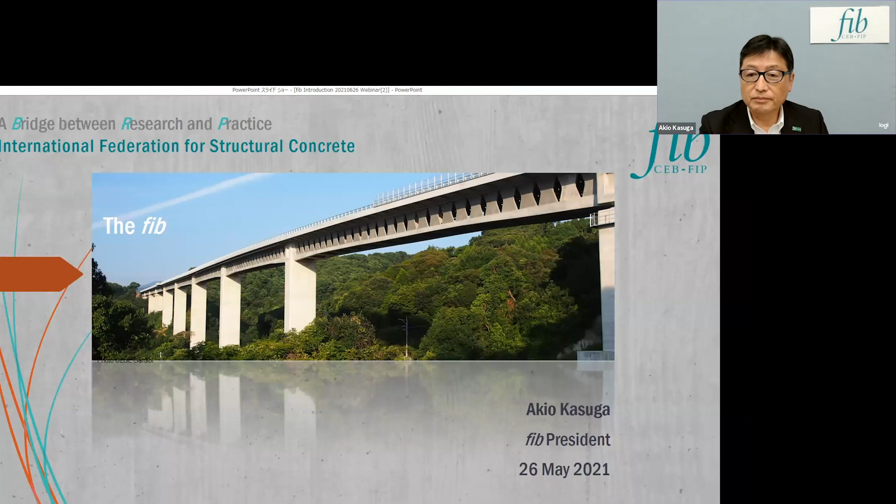Hello everyone, my name is Akio Kasuga, FIB President, and I'll give a very short introduction of FIB. Let me start with a little bit about the history of FIB.

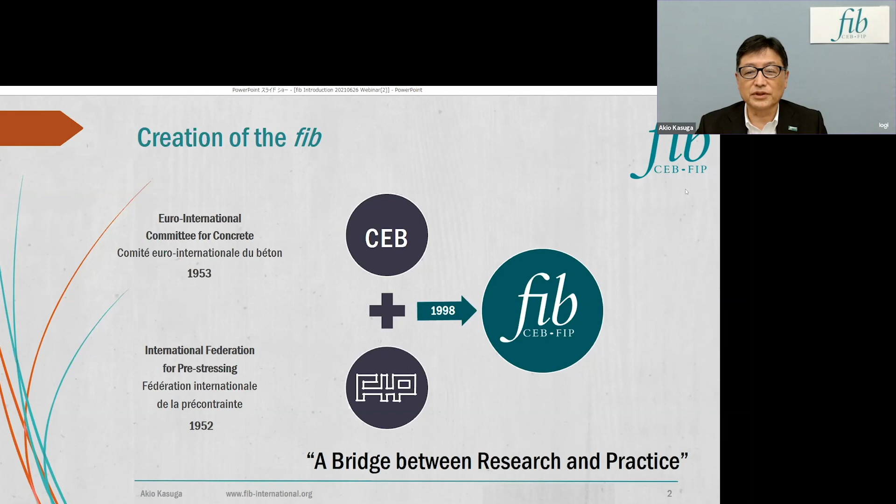FIB started in 1998, converging the CEB founded in 1953 and FIP founded in 1952. Our slogan for FIB is 'a bridge between research and practice.' Now we have 41 statutory member countries all over the world, and we have members in 104 countries and territories, including individual members.

This is our mission and objectives: we started from the stimulation of research and synthesis of findings, and also transfer to design and construction practice. After that, and this is very important, dissemination by publications, conferences, and so on. Finally, we produce recommendations and codes, and again dissemination of the information to all of the members. This is our main activity in FIB.

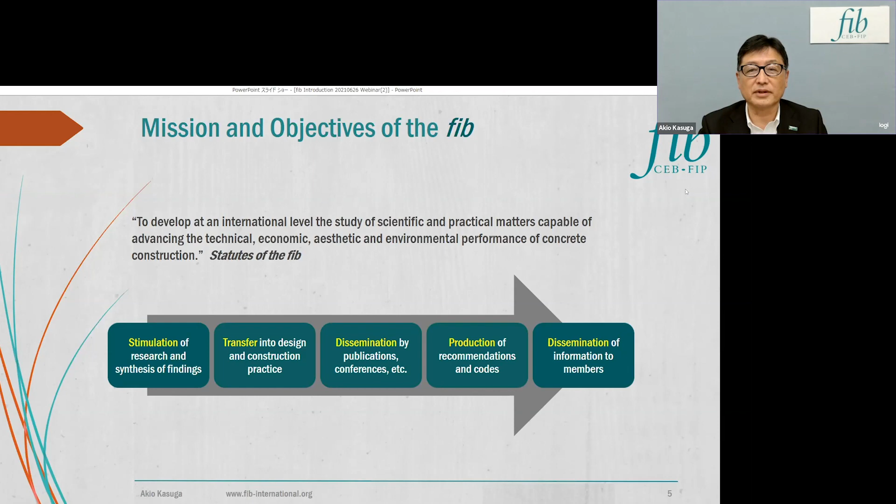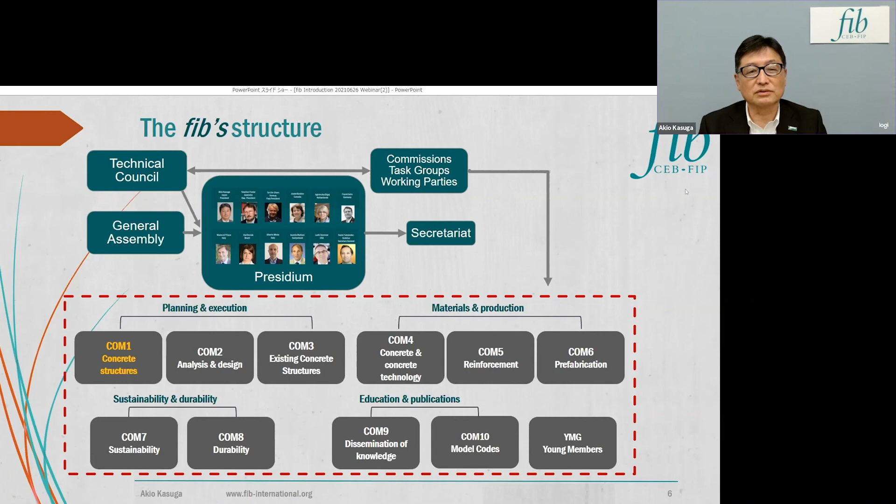This is our structure. We have a technical council and the general assembly, and we have a presidium, and many commissions from Commission 1 to Commission 10. Today's webinar is the output from Commission 1, concrete structures. This is the members of FIB from 2021 to 2022.

Tor Ole Olsen was the past president from 2019 to 2020. We have a variety of countries from all over the world. Our main output is bulletins from each commission. We have some categories: technical reports, state-of-the-art reports, textbooks, manual guides, recommendations, and model codes.

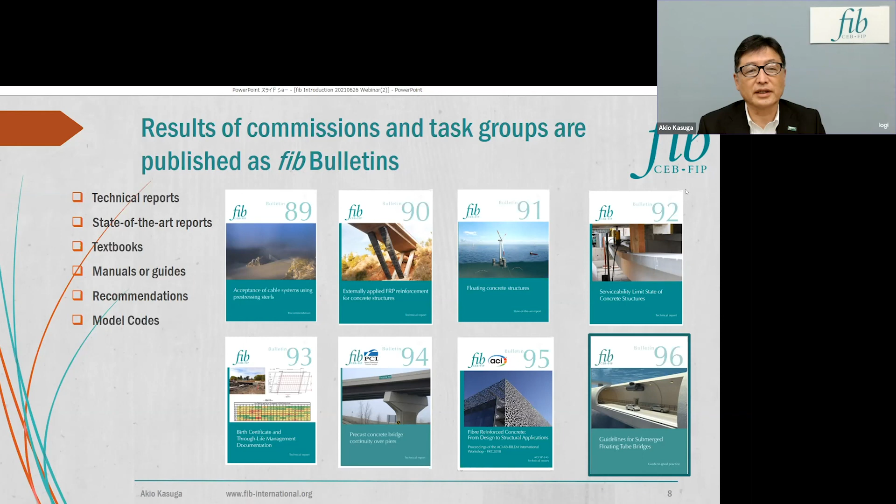We also have the Journal of Structural Concrete. Currently our impact factor is 2.174, a relatively large number for a civil engineering journal. We have 6 issues since 2016. We have many backlogs, and every time the number of papers is increasing.

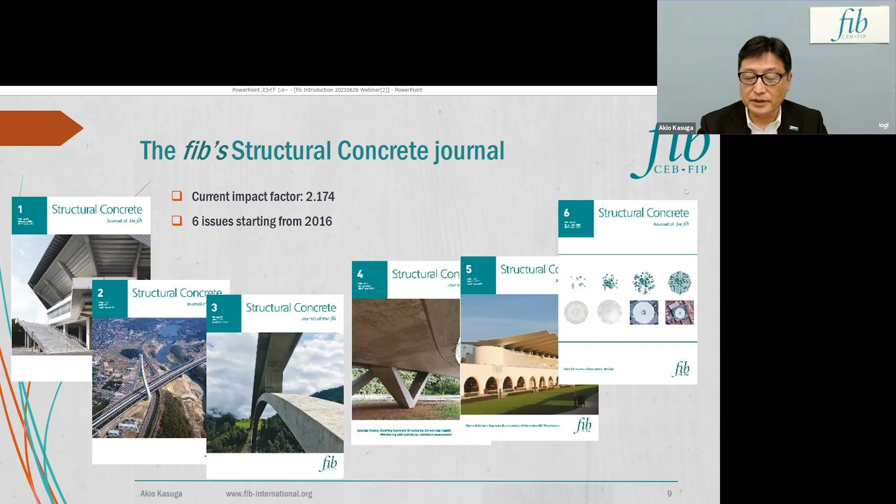So our biggest output event is the launching of the model code to the world. We are now revising the last model code, 2010, and we will launch the model code 2020, including leading edge technologies and many contents of concrete structures.

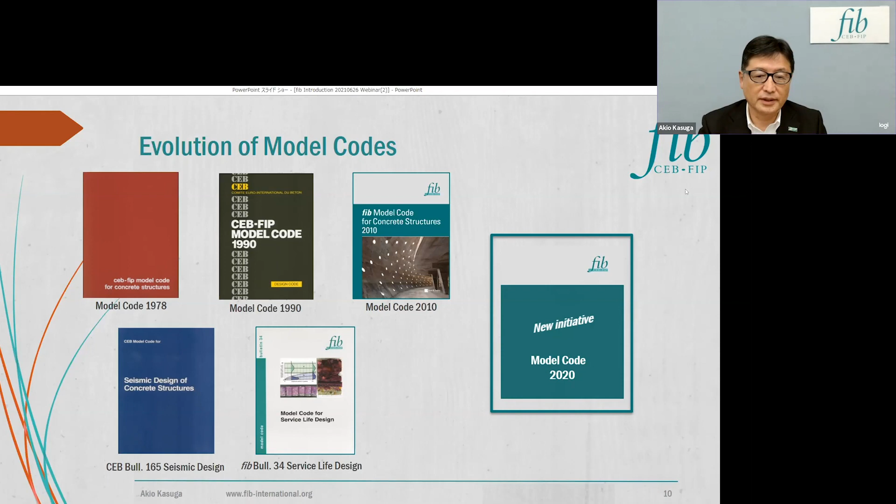Okay, let me tell you about some upcoming events. We have the symposium next month in Lisbon. Unfortunately it's totally online, but many papers will be presented there. Also the PhD symposium in Paris, France in July, which is also online. And the ICCS 21 symposium in Prague in September, and the conceptual design symposium in Switzerland also in September.

And also in 2022, the big event of the FIB Congress in Norway, and also that same year the symposium in Italy. Please come and join us—each event is very interesting for you.

And we have many outputs, bulletins and the symposium, and also we had output using social media. We have FIB News, e-newsletter, and these social media can be used to get information from FIB.

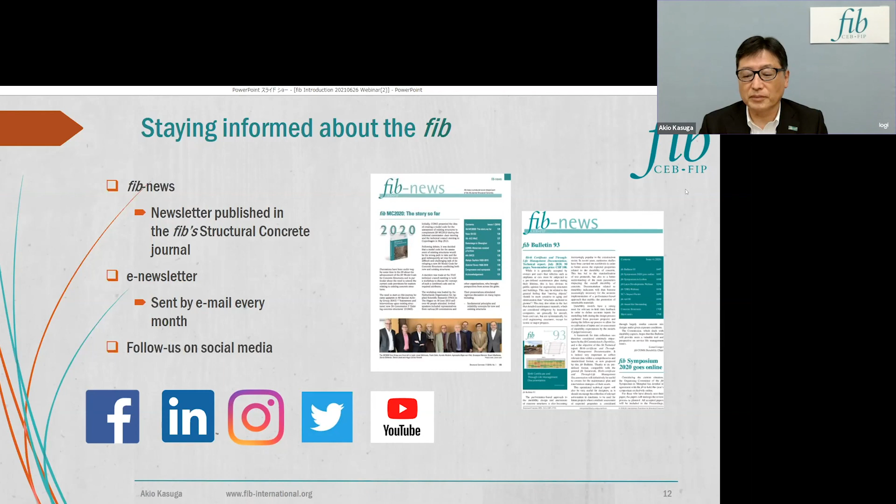And also at the same time, we have a webinar in the YouTube channel like today's event. We have many variety of speakers. Each speaker has very interesting topics. Please come here and join the webinar.

And one of our most attractive activities is for the young members group. The commission chair is Motohiro Ono from Tokyo University, and each country has a very active young member group.

This member group can be joined as a personal member even if your country is not a national member group. So please join us. Please exchange your information all over the world.

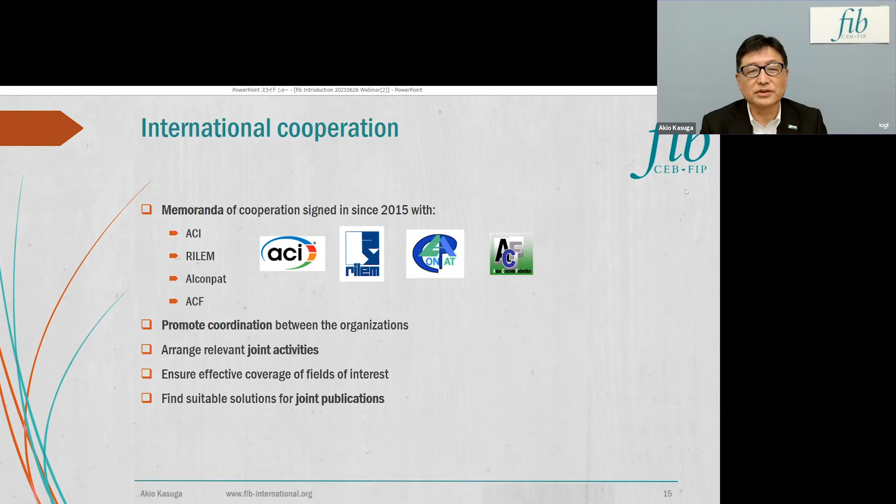And also we have collaborated with other organizations, ACI, RILEM, Alconpat, and ACF, and we had very close communication to make joint activities and joint publications.

And today, the submerged floating tube bridge is the output of working party 1.2.2, belonging to task group 1.2, the convenor Tor Ole Olsen. This is a task group for concrete structures in marine environment. It has been working a very long time, and today's output, Bulletin 96, is very interesting, as you know.

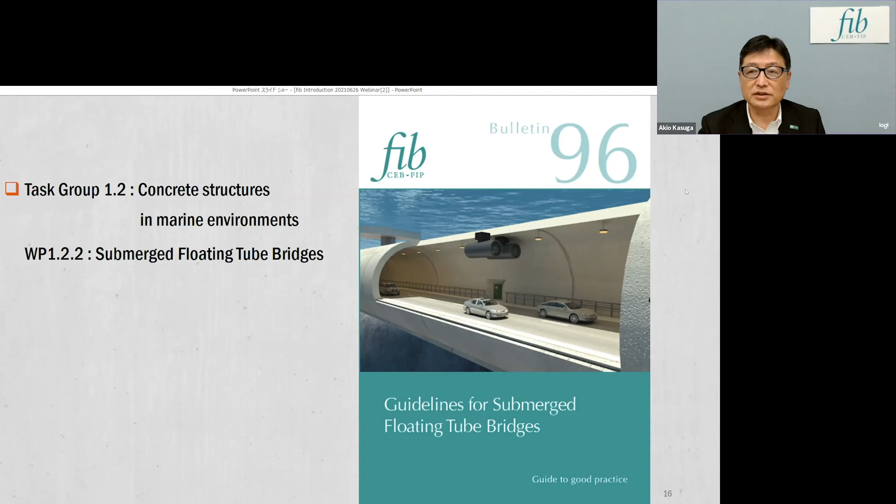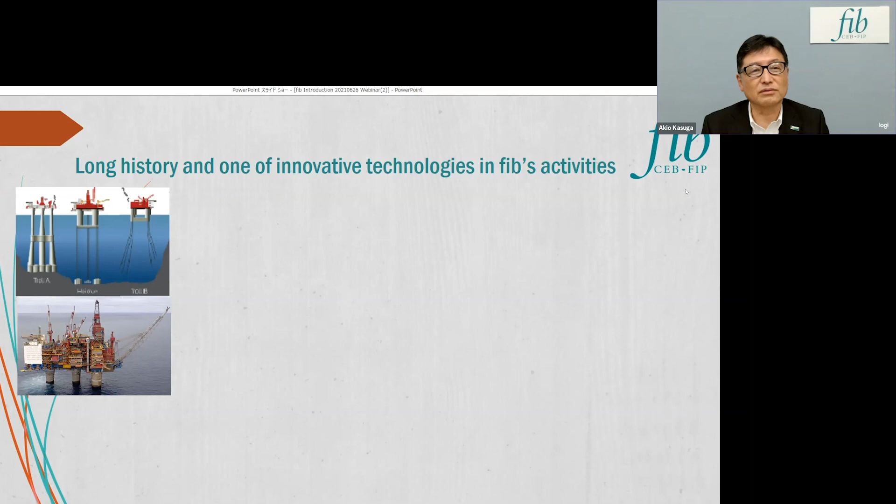Marine structures have a very long history, and I think it is one of the innovative technologies in FIB's activities. About 40 years ago, they had the technology of the oil rig, especially for the North Sea.

And now this technology has extended to wind turbines on the sea, and also today's topic, the tube tunnel under the sea. And Tor Ole Olsen said that by 2070, the temperature of Earth is rising, and also the water level is rising.

They are thinking about floating residential houses like this. And at the same time, if the temperature of Earth is rising, humans might live under the sea like this.

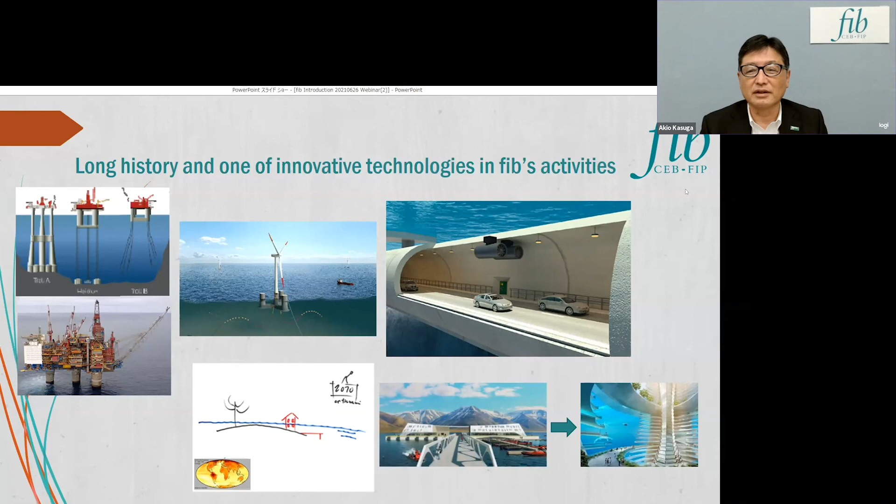So this structure for concrete in the marine environment continuously leads to all of the possibilities in the future. So please enjoy the webinar today, and thank you very much for your attention.

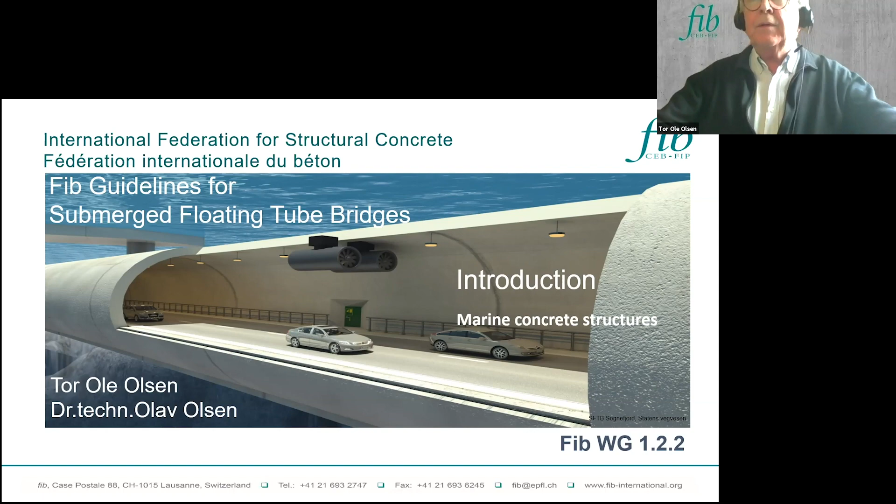Hello, everyone. We continue with marine structures. Before we go on to the real content of today's webinar, I will say a little bit generally about marine structures. Yes, most of us like the sea, and the sea is also very useful for many purposes.

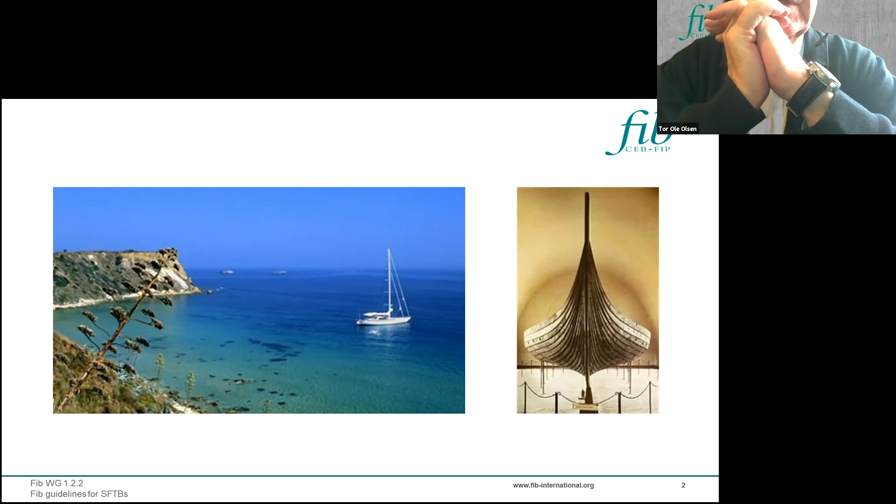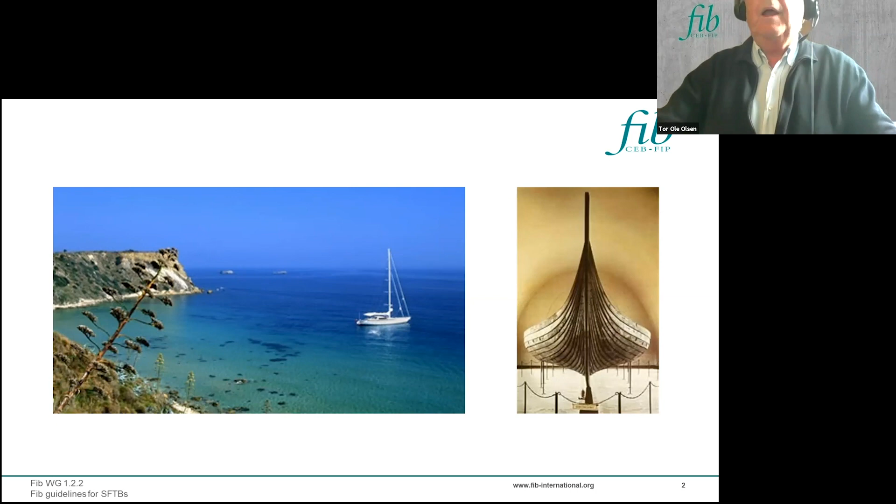The ship to the right here carried Norwegians across the North Atlantic some 1200 years ago. So ships have been used for all times.

There are some distinct differences between designing and constructing ordinary land-based concrete structures compared to marine concrete structures. And I will try to highlight that a little bit.

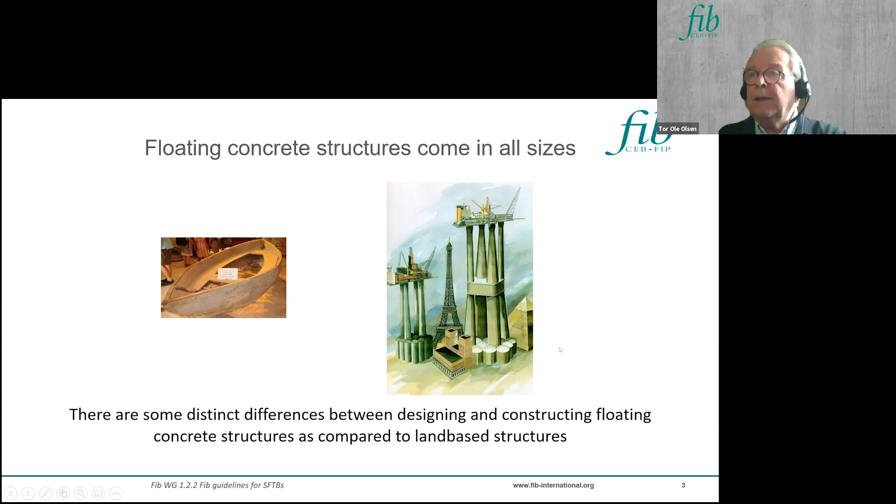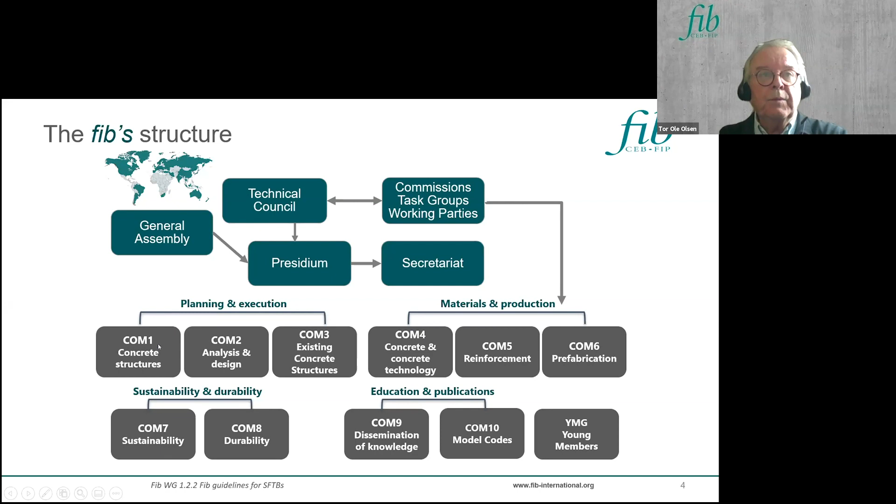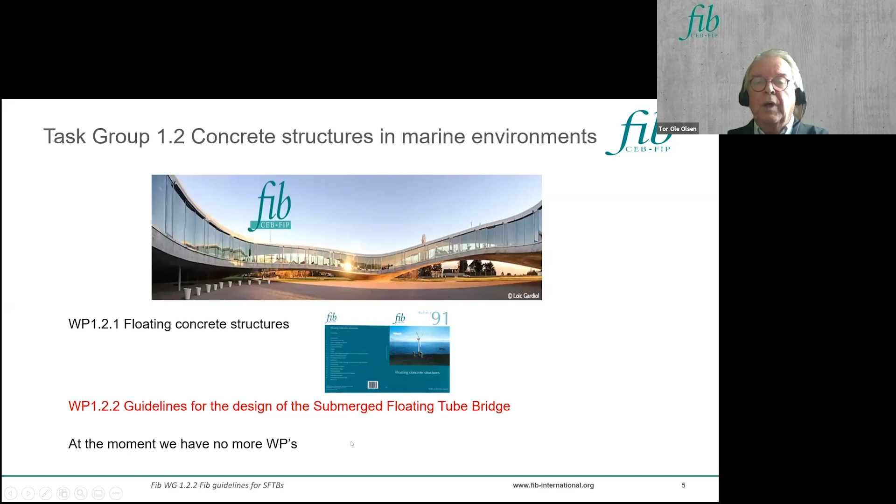A couple of years back, in 2019, we produced Bulletin 91, named Floating Concrete Structures. And the Submerged Floating Tube Bridge is working party 1.2.2. At the moment, we have no more working parties under discussion, and if any of you have suggestions, we welcome them.

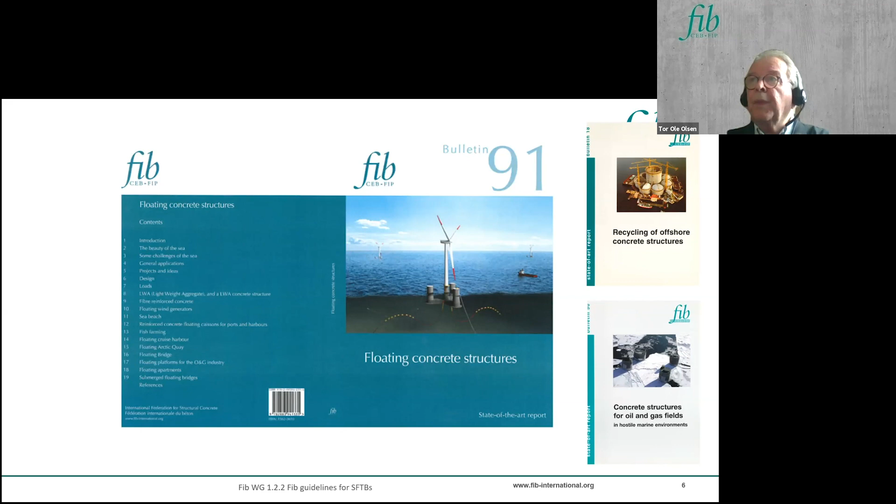Bulletin 91, Floating Concrete Structures, looks like this. We have previously produced a couple of bulletins: recycling of offshore concrete structures some years back, and then concrete structures for oil and gas fields in hostile marine environments.

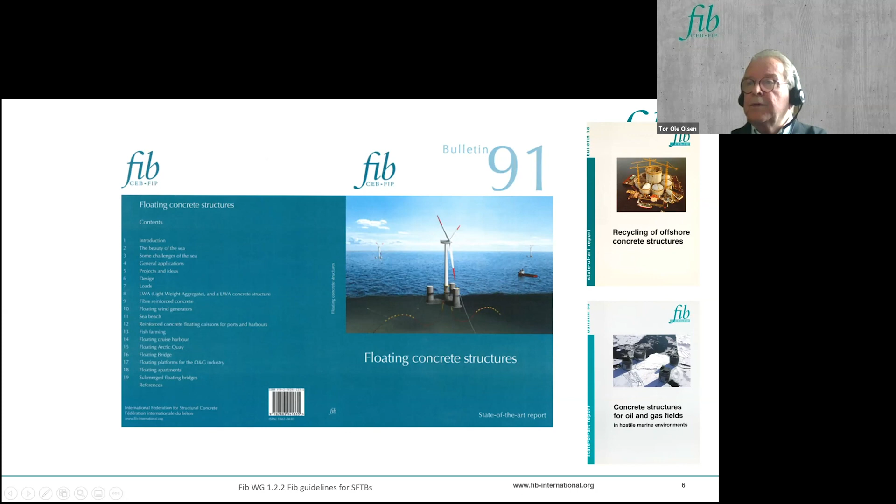Now, why is FIB interested in marine concrete structures? In Bulletin 91, we listed 12 potential usages. There may be more. If you are creative, you may find many more.

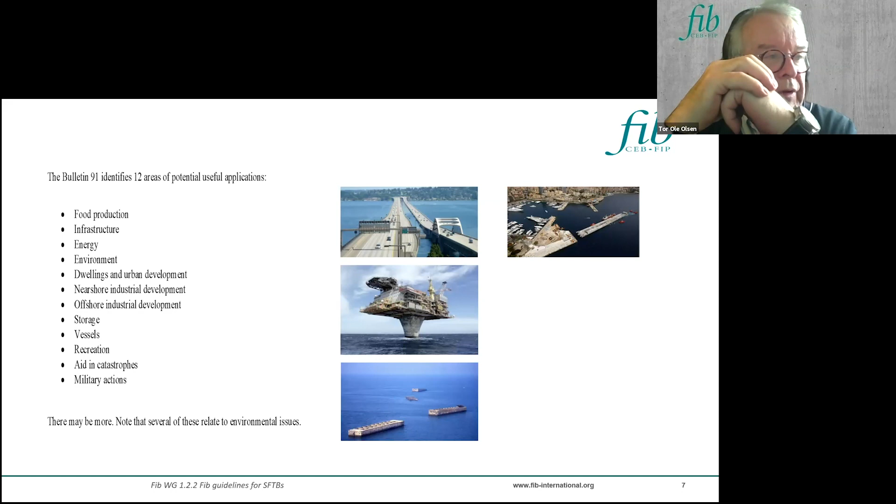This is a concrete platform for oil production. This is a floating bridge in the state of Washington. And this to the right is a harbor extension in Monaco. And as you will know, Monaco does not have very much space, so space is one of the factors that concrete marine structures can help out with.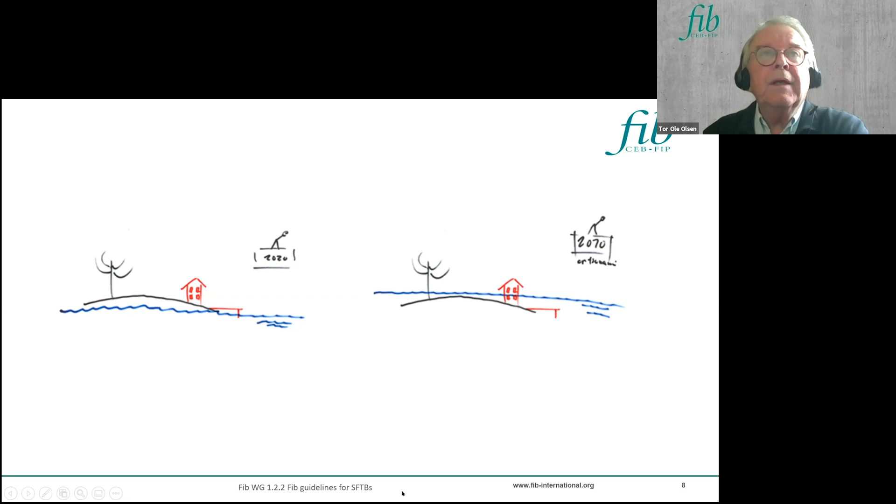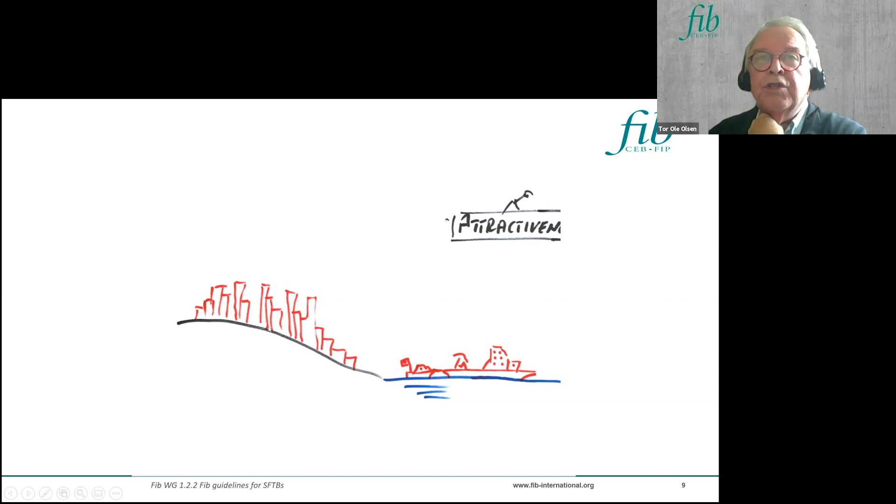Another usage of marine concrete structures is for attractiveness. If you live here, you might wish that you lived here. You have a foundation issue. You have the use of land - do we need to have buildings everywhere in our cities?

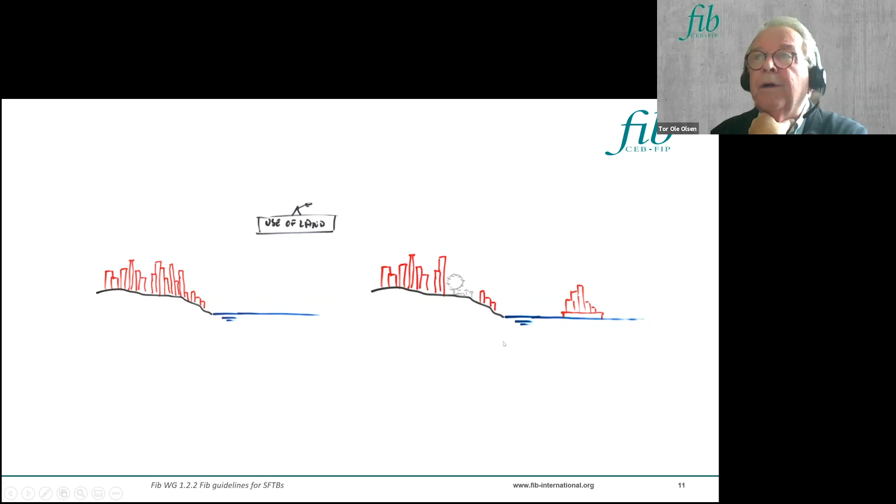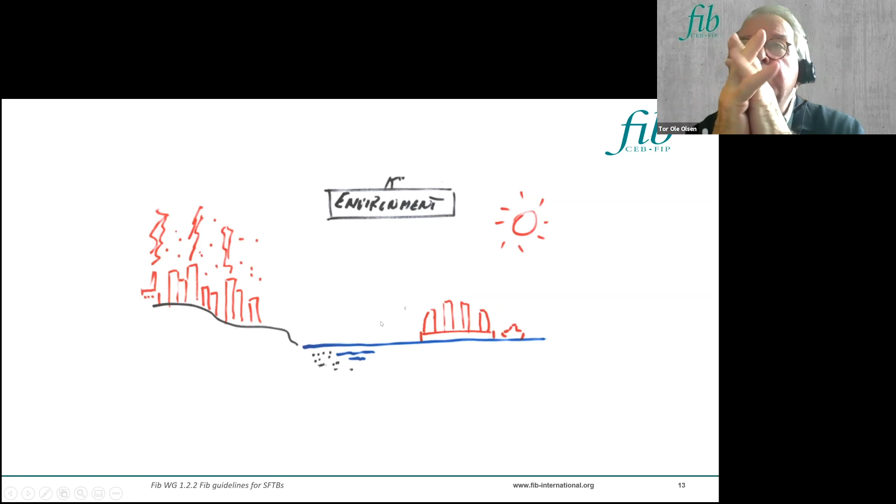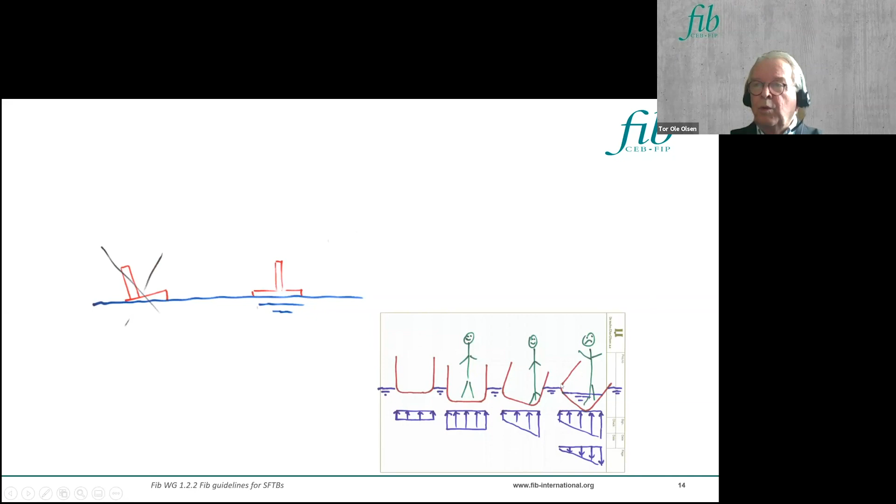Construction issues and challenges, environment and pollution is an important factor. But there are some challenges. You cannot build a high-rise on the edge of a barge because it will tip and maybe capsize. Some of you have experienced this if you have been in a small boat half filled with water.

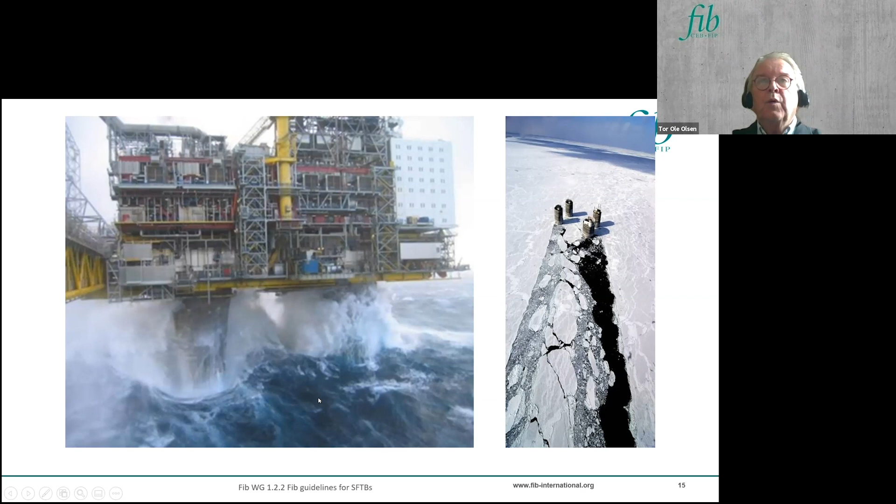And for real structures, you have some challenges, waves and ice. But you also have a very large beauty, and that is the beauty of buoyancy. This structure here weighed 1.5 million tons when it was transported from here, several hundred kilometers, and installed. Lifting 1.5 million tons is not possible anywhere else than in the sea.

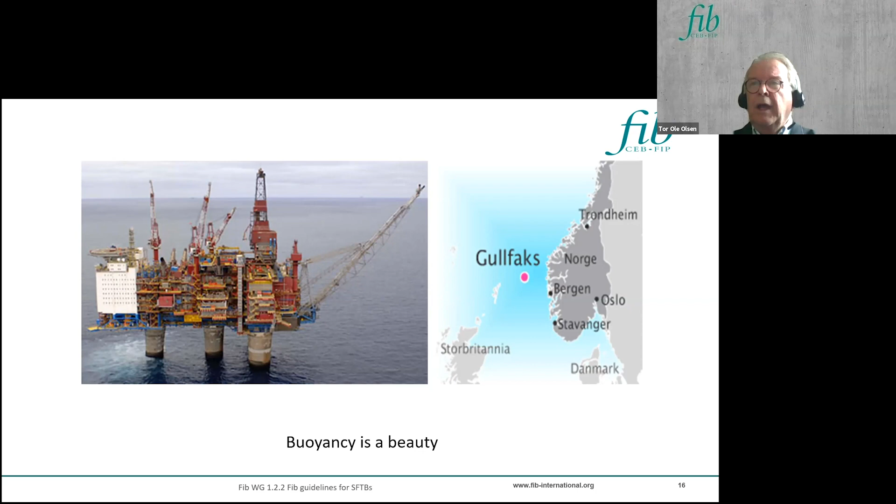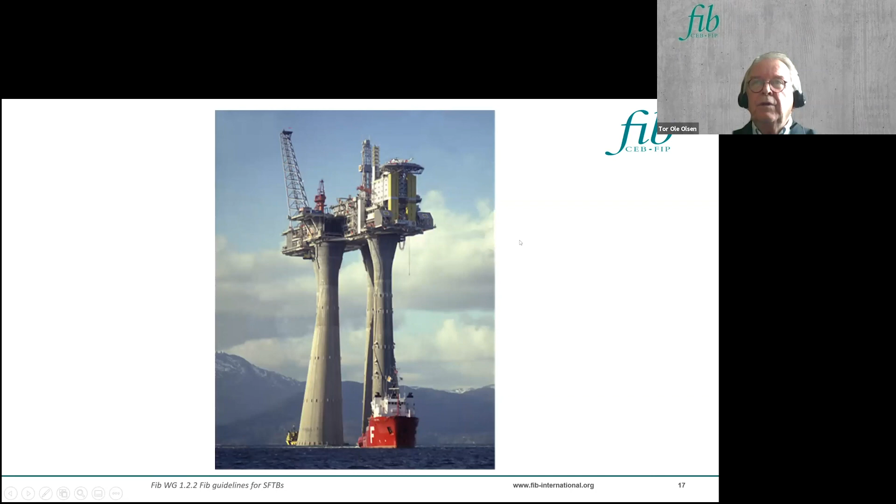This structure carries 22,000 tons, 150 meters above sea level. So with the buoyancy, it is a real beauty, but you need to make sure that it relates to the gravity. Both gravity and buoyancy are acts of Mother Earth. So both the size of the weight and buoyancy should match, but also the location. If they don't match, you may have serious problems - you may sink or you may capsize.

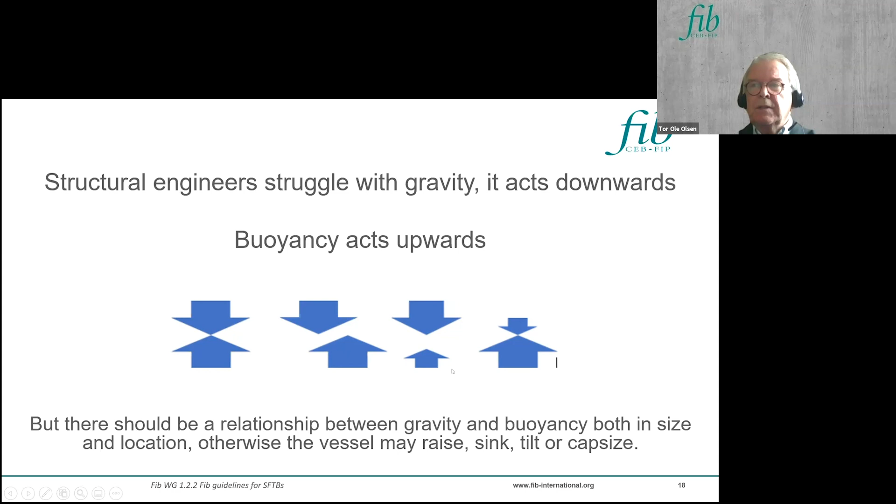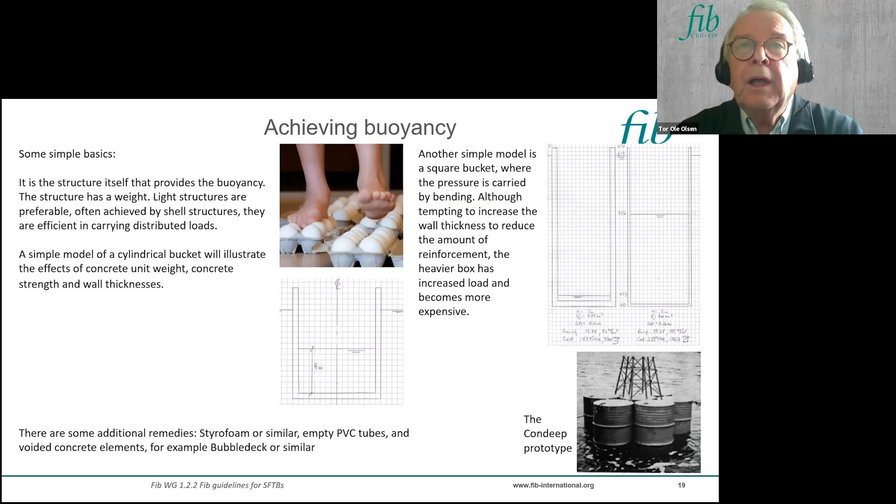How do we create this buoyancy? This is a very simple sketch, a cylindrical bucket, and it is the bucket that provides the buoyancy. If you make your own calculation on a very simple model like this, you will illustrate the effects of concrete unit weight, concrete strength, and wall thickness. You can realize that if the concrete is very heavy and the strength is very low and the loads are high, you may have difficulties. This is why so much useful research has been done on lightweight concrete and high-strength concrete.

Another maybe a little bit surprising example: if you have a square bucket where the water pressure is carried by bending, you may be tempted to increase the wall thickness to reduce the amount of reinforcement. But by doing that, you also increase the load. So you can show that increasing the wall thickness gives you a more expensive structure than keeping it slender.

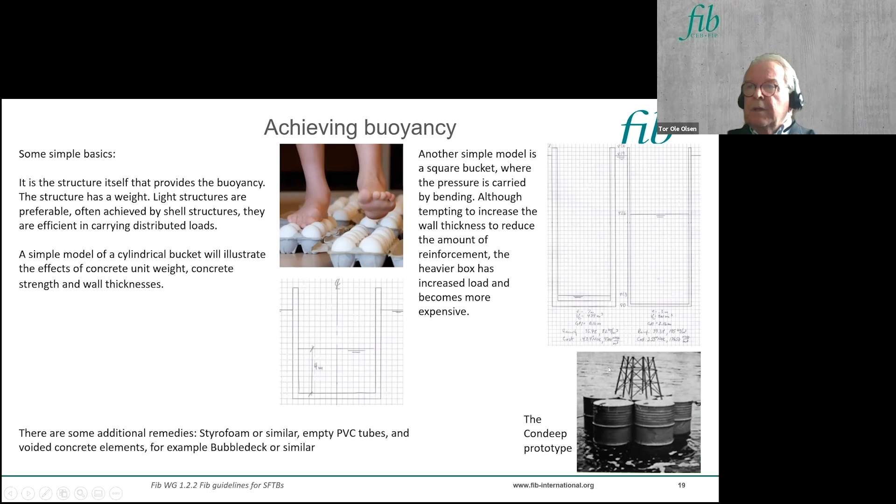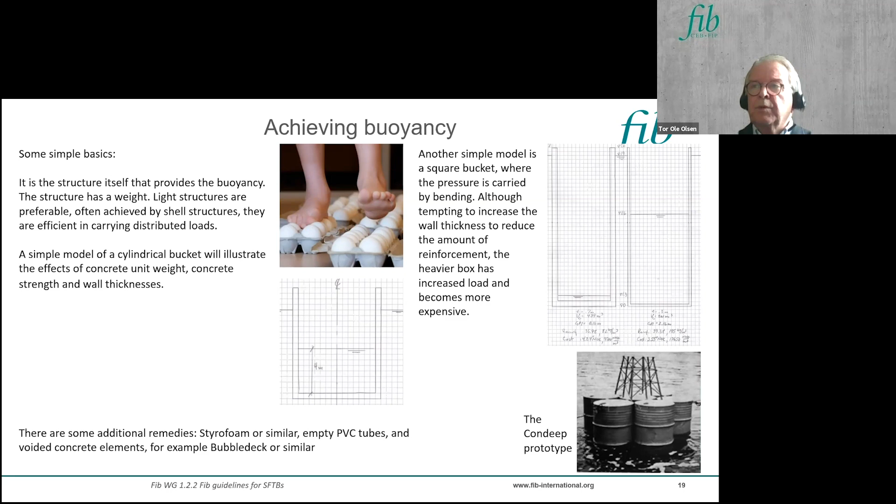This little picture down to the right is the prototype of the Condeep. Condeep is a concrete platform for oil and gas production, and these are the 15 Condeeps that have been built. There are others in the world - you have 2 that sit in Canada, 2 in Australia, and 3 in Russia.

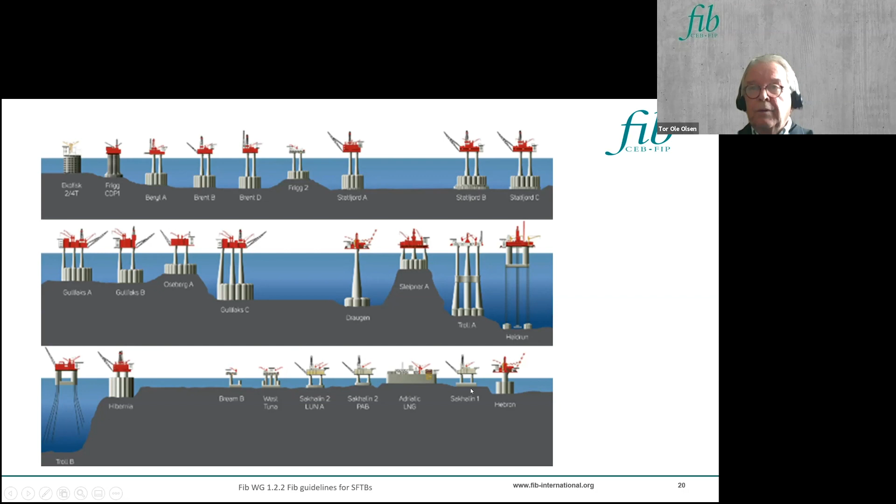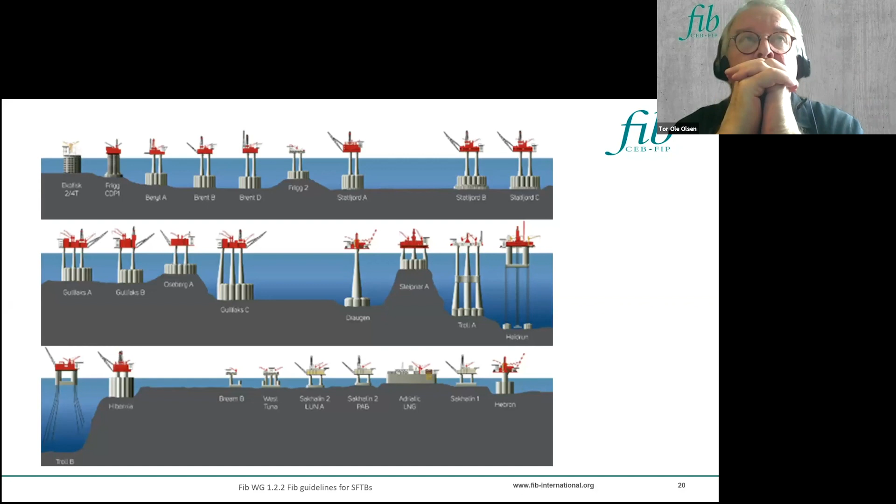And you have a gas, LNG gas plant in Italy, in the Adriatic. So altogether there are 29 offshore structures for the oil and gas industry. Altogether in the world, there are 50, and they behave well - we know because we have tested them.

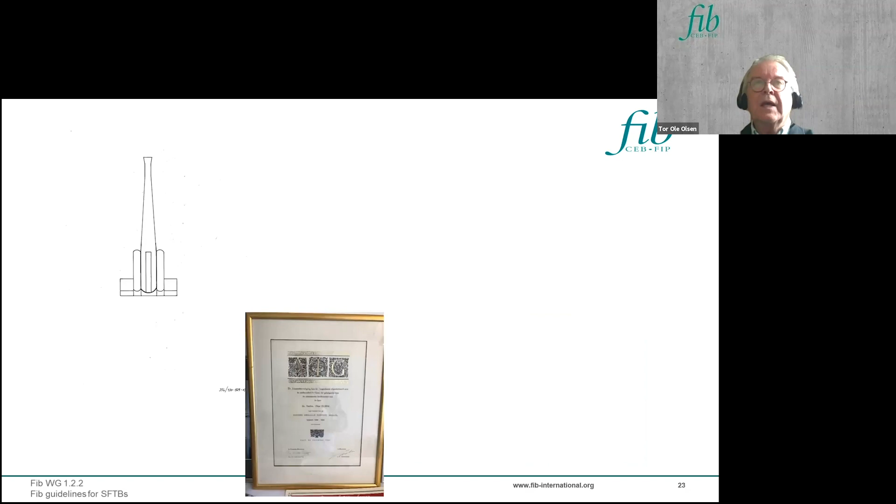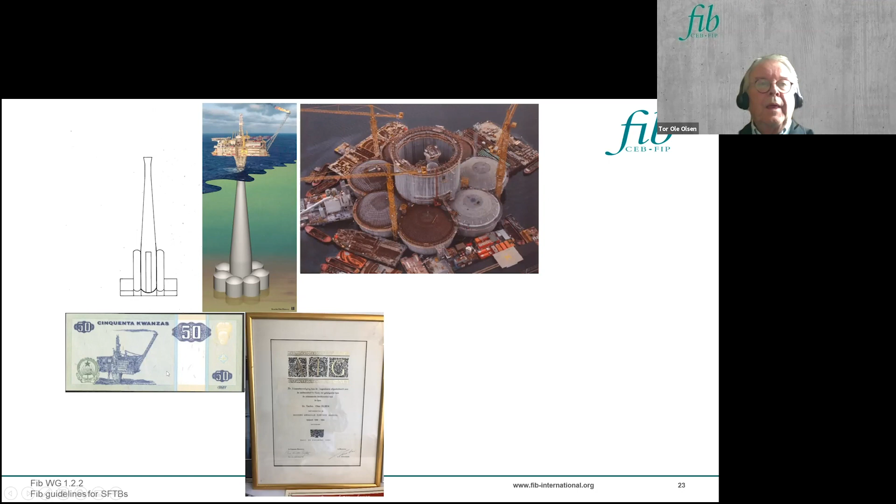Some of them are pictured. This is a Norwegian stamp, and most likely it was not the structure but the amount of money that comes in from the sale of gas that made them make the stamp. This is another one pictured - this is an Angolan bill. So why they put our platform on that, I'm not quite sure, but they do.

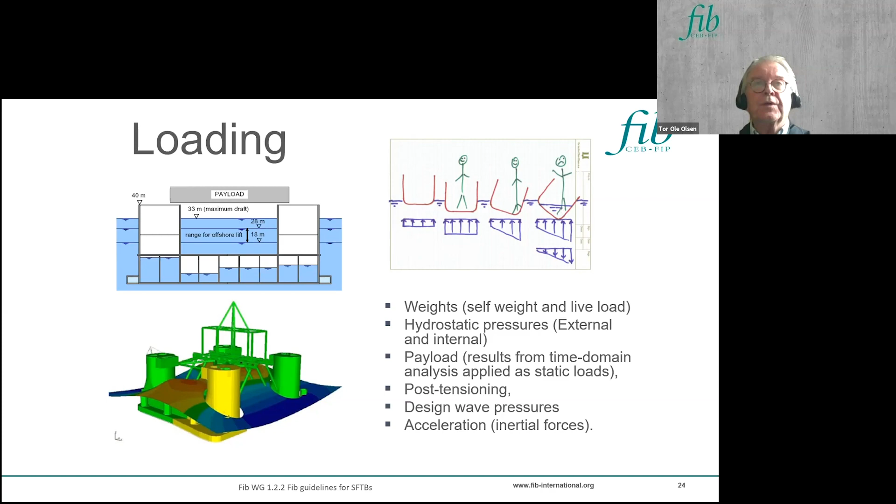Another aspect of floating concrete structures is that you have a lot of loads. You have ballasting, and you have waves and wind from all directions. To take care of these, we need some routines, obviously, and we need also to keep our minds clear what is what.

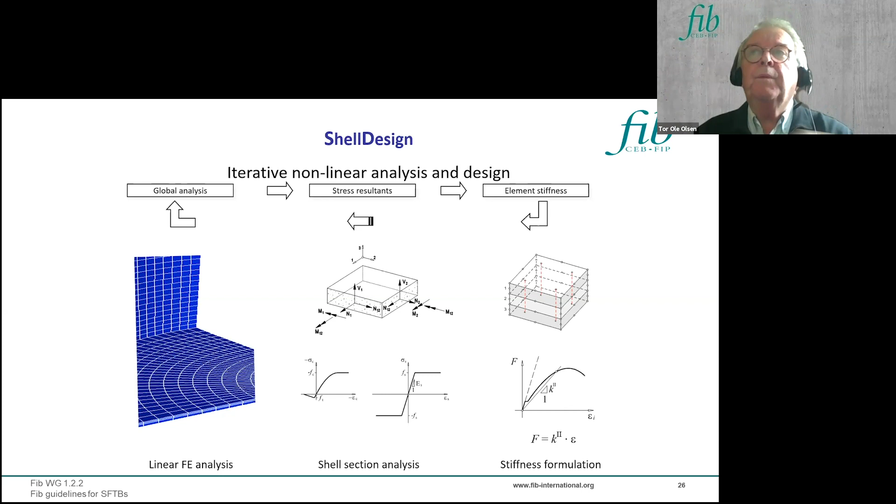It's a logistic part of this to keep track of all the numbers and all the load combinations. Today we obviously use finite element analysis for the structural analysis. We have now included nonlinear iteration, even for large global analysis with several million degrees of freedom, and this is necessary to design these structures.

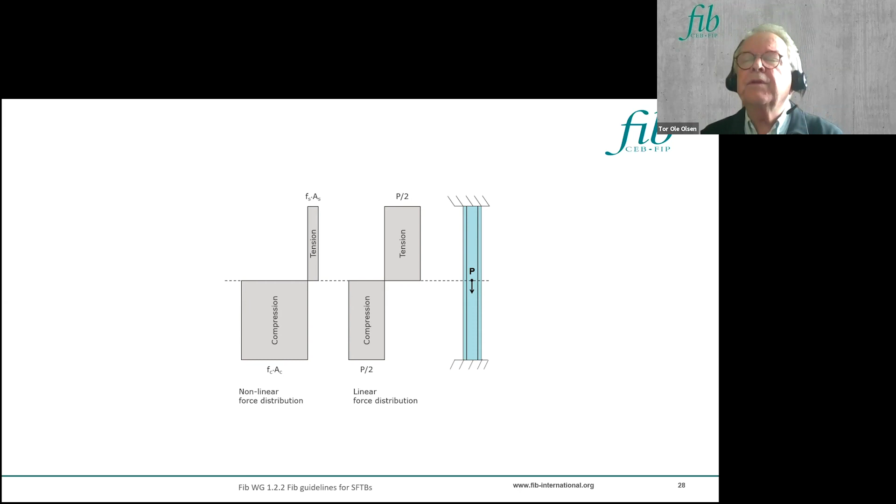A simple explanation for why nonlinear analysis is important is that the old fashion of just modeling stiffness by the thickness of the concrete structure is very incorrect, particularly if you have very little tensile reinforcement. You see that you get both unconservative and conservative results using the old method.

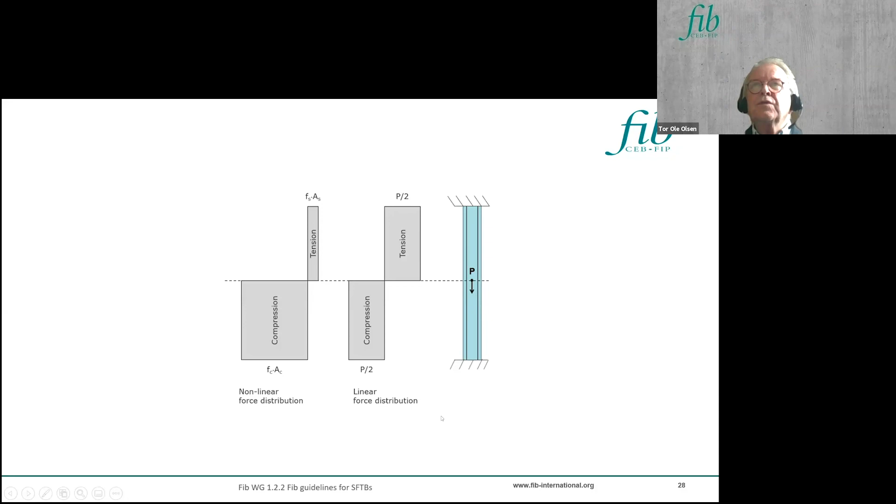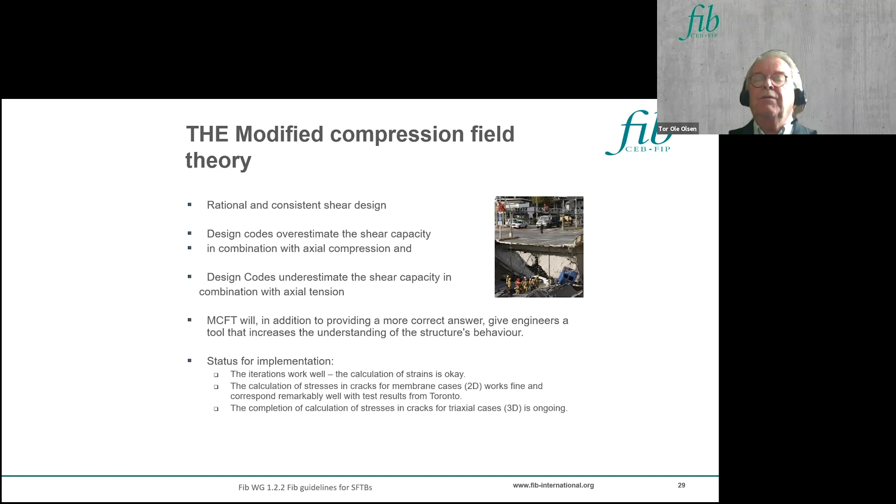If you are working with structures that do not resemble laboratory type structures, you need real models also for shear. For this purpose, you can now include the modified compression field theory, which gives you much better results, particularly if you work with unusual structures.

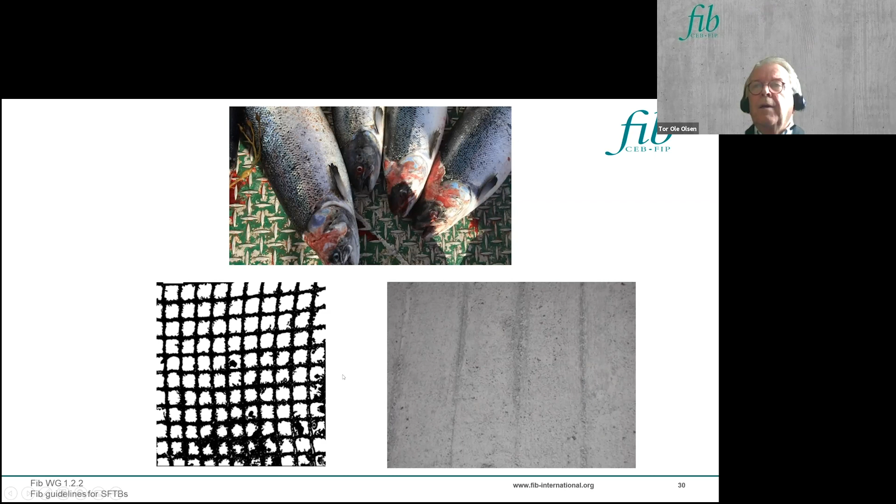So we have worked a lot with making concrete buckets to prohibit this. But we have a challenge, and that is a concrete wall is typically more expensive than a net. Nevertheless, we have designed and built small buckets. We are using styrofoam to achieve buoyancy, with very thin walls, 100 millimeters.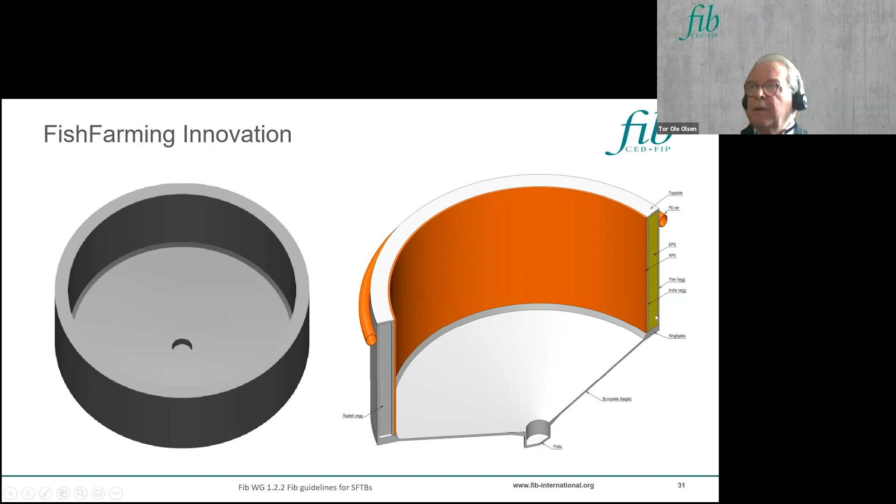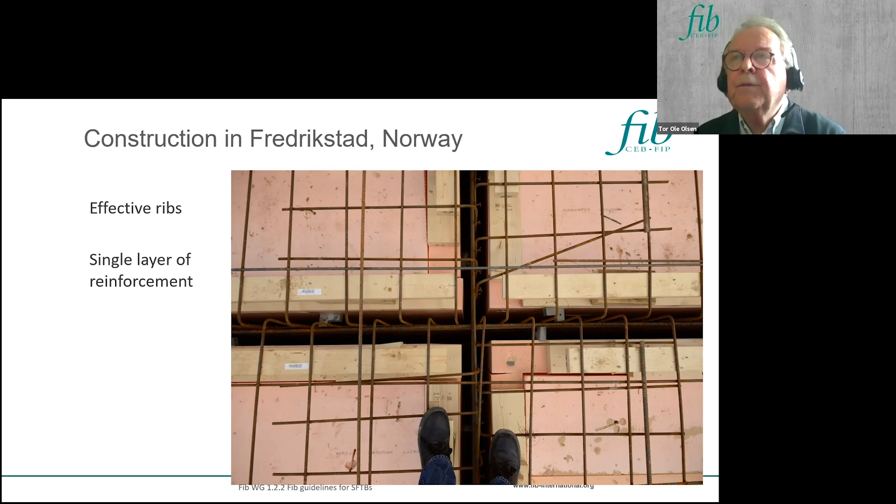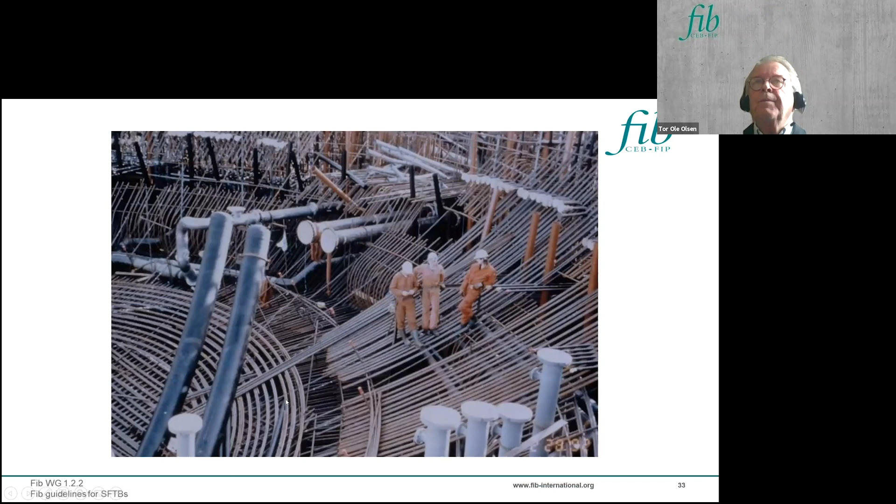This is another structure, but we have utilized our computer tools to document that we can get away with a single layer of reinforcement. That saves weight. The pink here is again styrofoam. And you should always remember that the structure has a purpose, and you need to include that in your design.

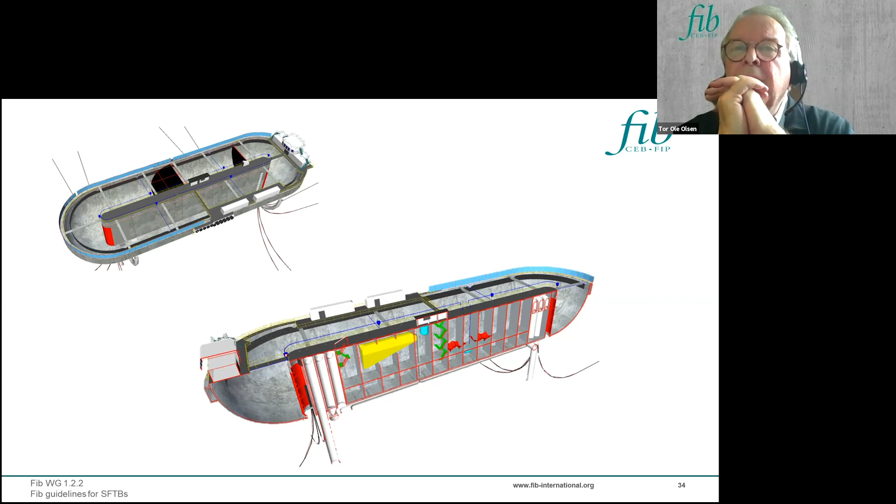This is a larger fish farming area, and you can see that the equipment to be able to produce fish is rather extensive, actually. Salmon use a lot of fresh water.

Akio mentioned dwellings. This is a concept for apartment buildings, and you may see that we have made the structure symmetric to make sure that the structure doesn't tilt too much.

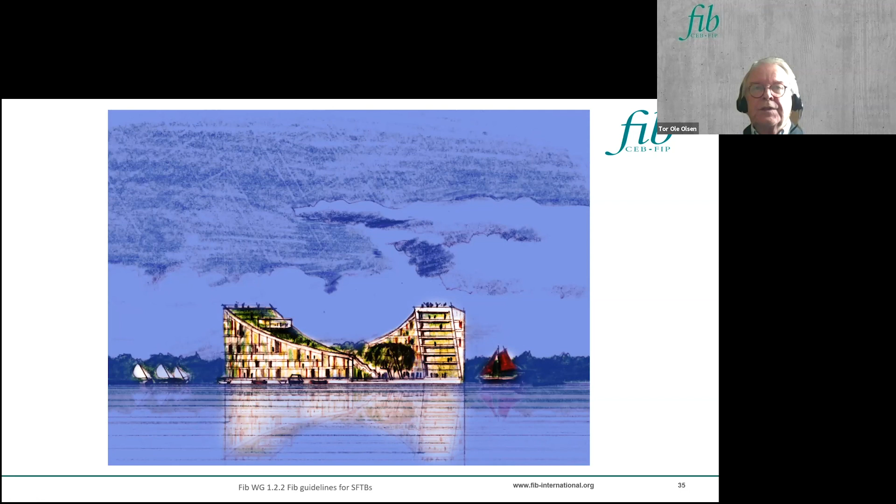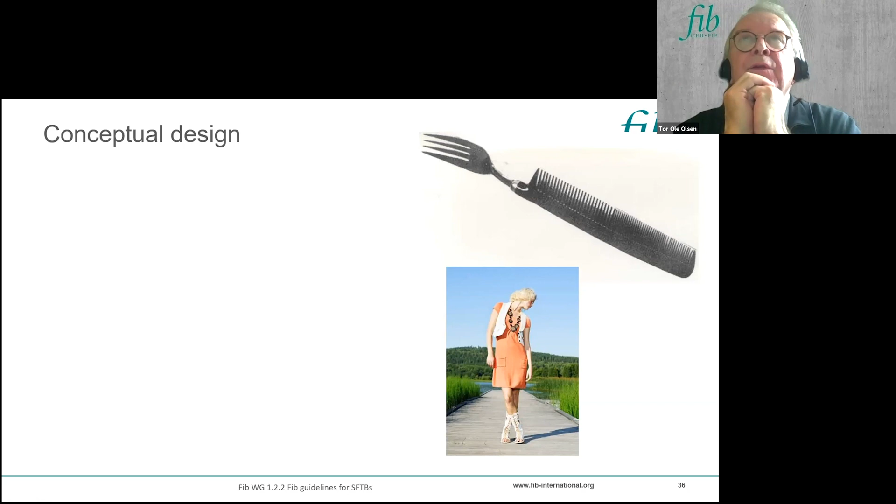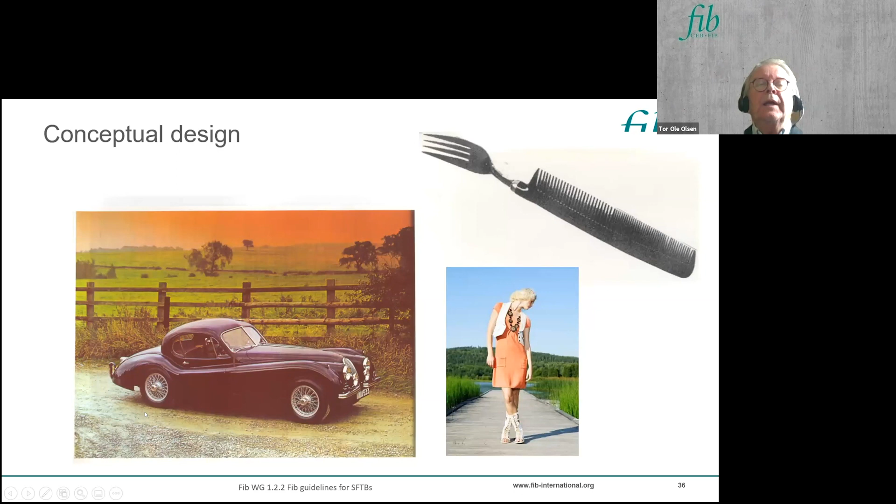And then a few words on conceptual design. You have good designs and you have not so good designs. Sir William Lyons designed this car in two weeks in 1948. You need a lot of courage, because if you start in the very, very safe end, you may never end up with a structure that floats.

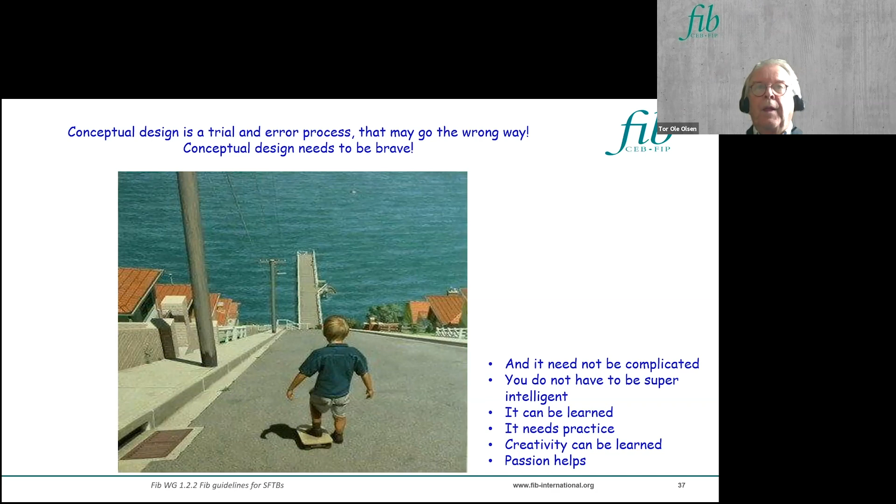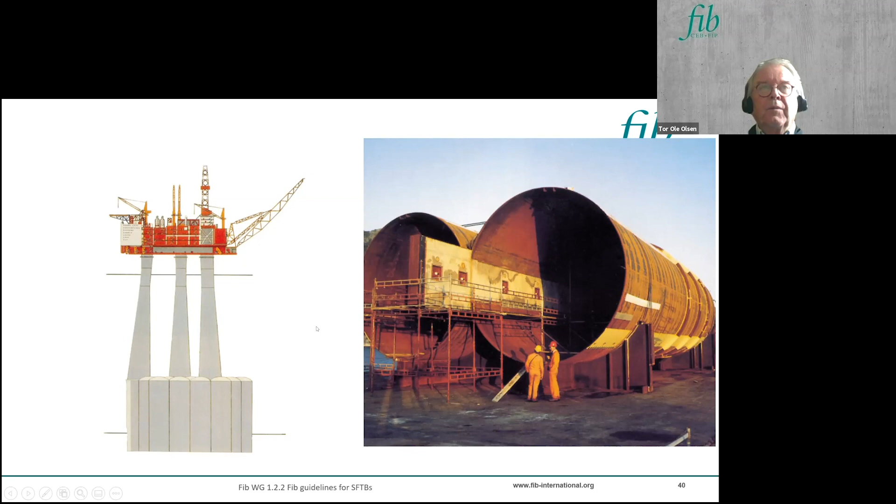This is the first page of the conceptual design. You have a lot of freedom. This is just to show an example where the original design had 42-inch gas pipes running outside a platform, a water-filled platform. You cannot have gas-filled pipes within water, so they are turned into the structure below sea level in a spaghetti-like fashion.

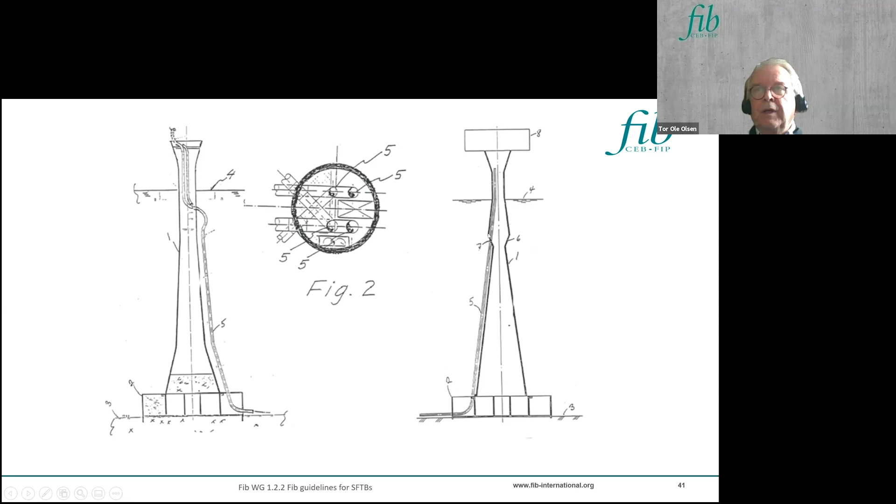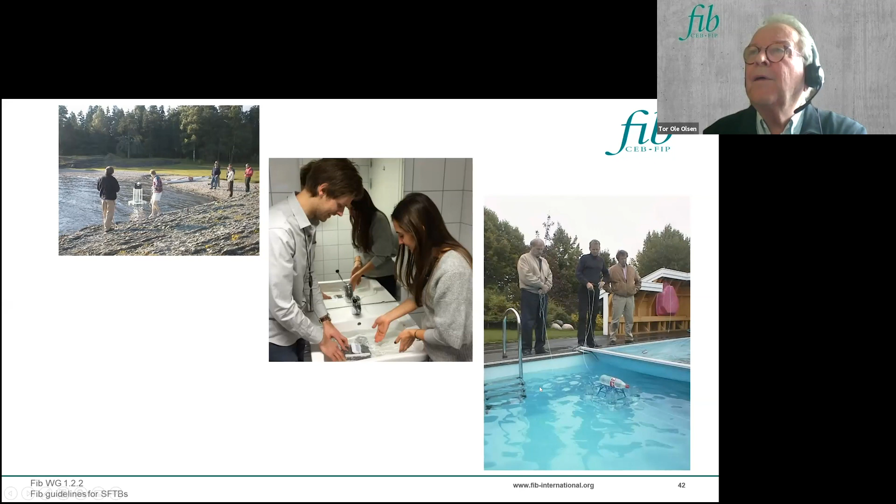And that was what I had to say for the introduction on general actions on concrete marine structures. Thank you very much.